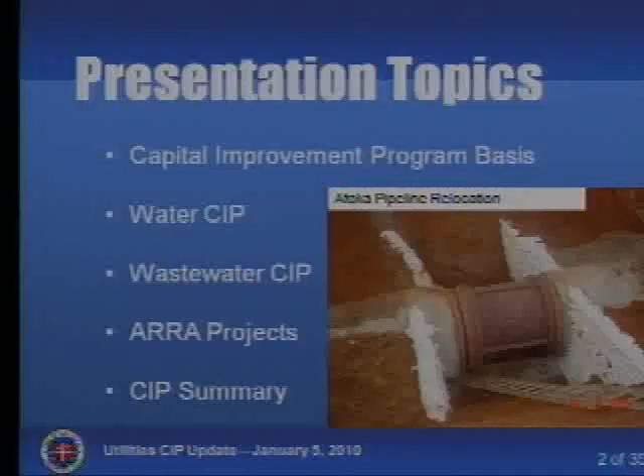Hello, my name is Sam Samandi, engineering manager for the utility. I'm here today to give a brief presentation on what we're doing with the CIP program. I'm going to cover a little bit about the basis of the program, then delve into the water portion of the CIP and the wastewater, and summarize what we did with the ARRA projects.

The basis of the program, the driving force behind all of our CIP projects, is on the water side the water master plan conducted in 2003, and the wastewater master plan conducted in 2009. In addition, we do an annual system review and evaluate projects, and if we need to modify the CIP, we'll update that. Another big issue for us is making sure we are in regulatory compliance with our system.

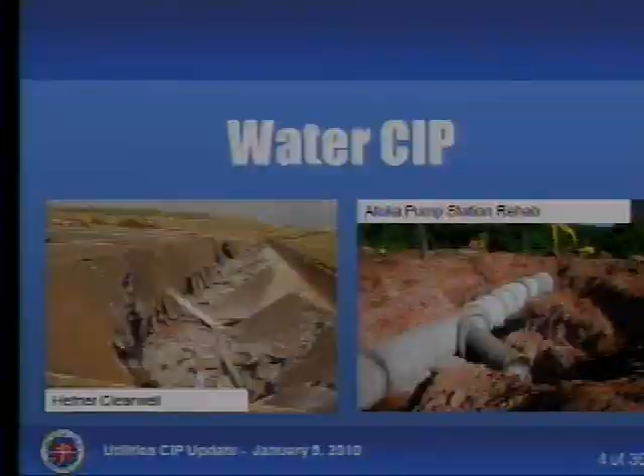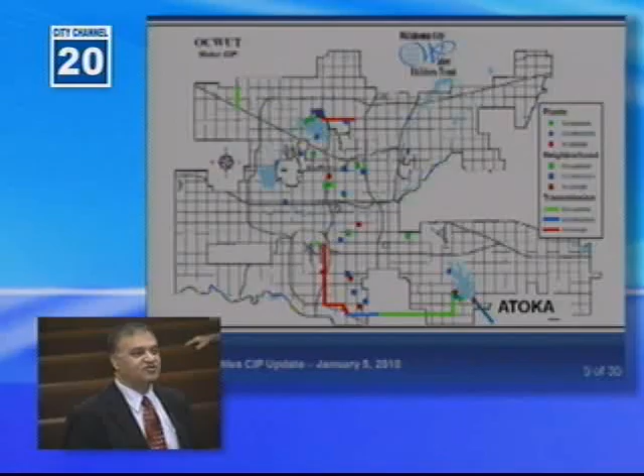We start with the water CIP. This particular chart shows the city of Oklahoma City and essentially shows the projects we've been completing for the past 6 to 9 months, the projects in construction, and what we're thinking about doing in the design side in the near future. A lot of those blue dots are right in the center of Oklahoma City, where most of the projects within residential areas and rehab work are happening. Another major aspect is the big water line, which we call the westward extension, from Draper to west of Oklahoma City.

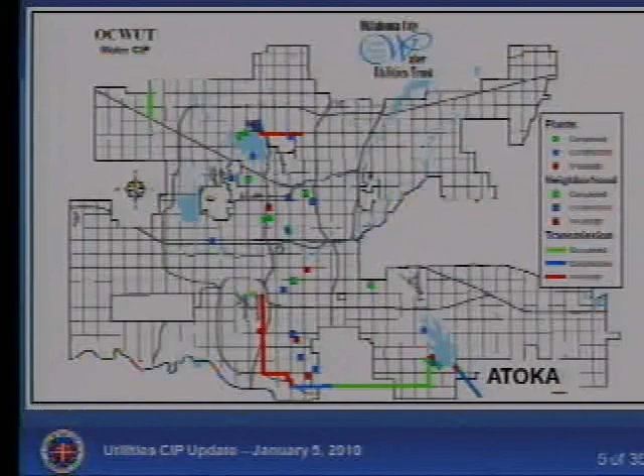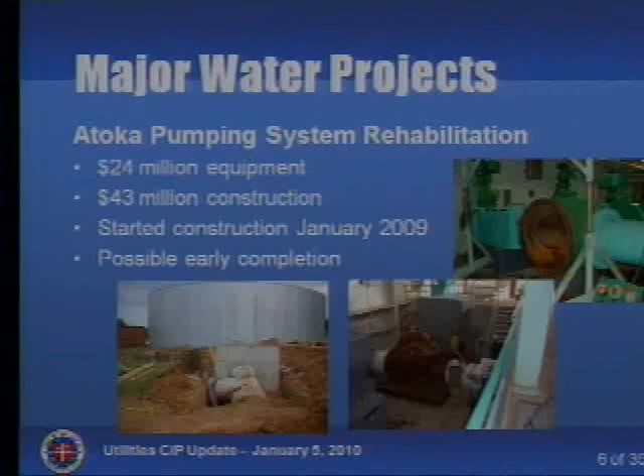Some of the major projects in construction include the Atoka Pumping Station Rehab Project, so far about $67 million worth of equipment and construction. The project started in 2009, last year about this time, and we're hoping for an early completion by the end of this year. It was scheduled to be completed in August 2011, but we're hoping to beat that by about 8 to 9 months.

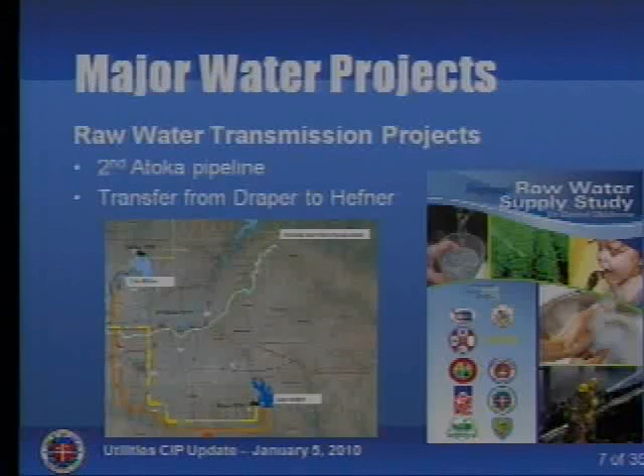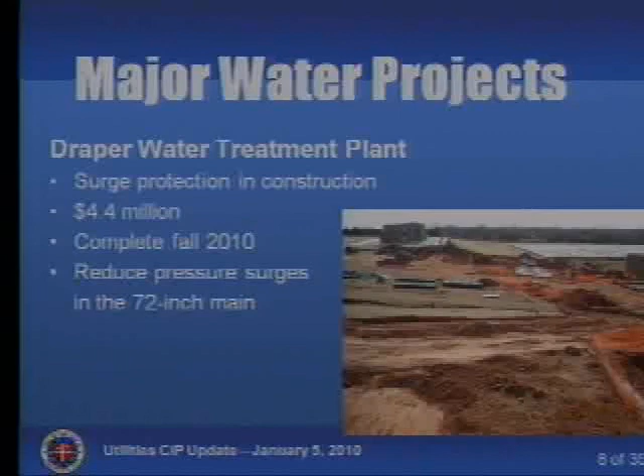Other projects we're considering include a second Atoka pipeline, and we've started some work on that. Also under consideration is the transfer of water from Draper to Hefner. Another major ongoing project is providing surge protection for the Draper water treatment plant. Hopefully this will help minimize breaks on the 72-inch pipeline, which has given us trouble in the past, and we hope it will be completed this year in the fall.

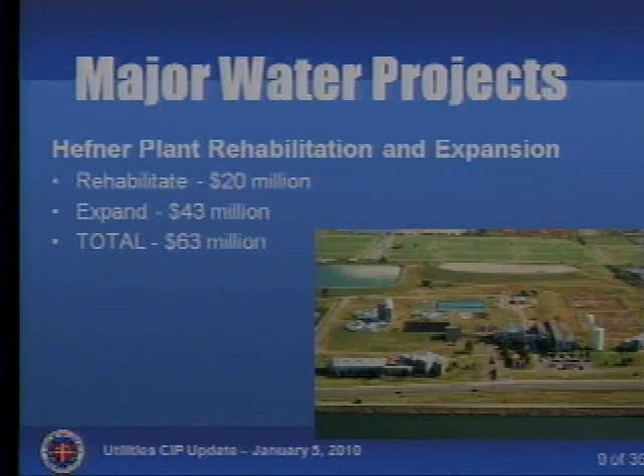Another major project is the work we're doing at the Hefner Water Treatment Plant, which we've heard about in a previous presentation. We've done about $20 million worth of rehab work, currently in construction, and the expansion will hopefully come in the next 6 months, estimated around $43 million, totaling around $63 million.

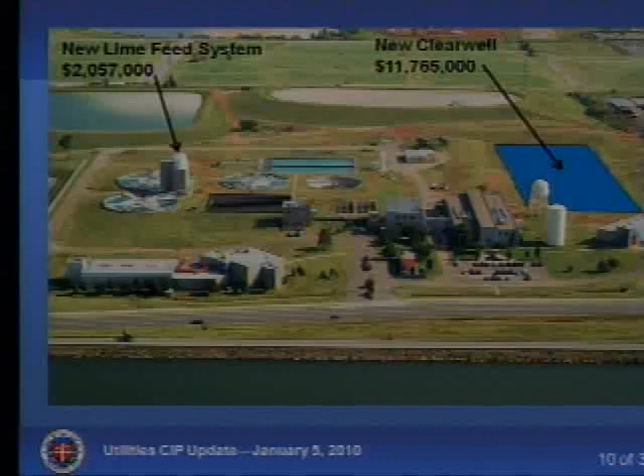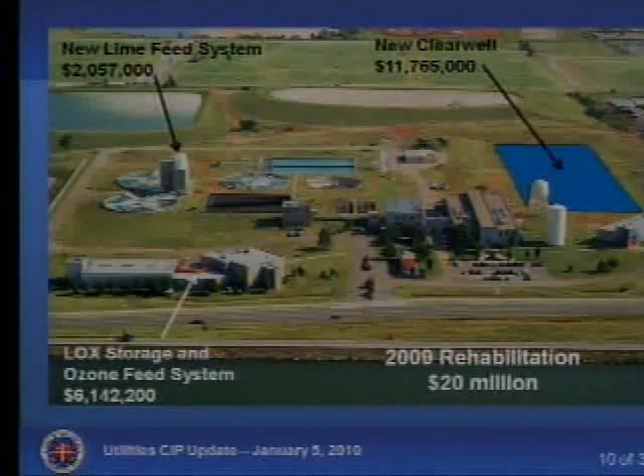This picture shows the rehab project that's ongoing. We're putting a new lime feed system at the plant, replacing existing clear wells that were dilapidated with structural problems, and replacing the air system for the ozone feed system at the Hefner plant. Somewhere around $20 million worth of work.

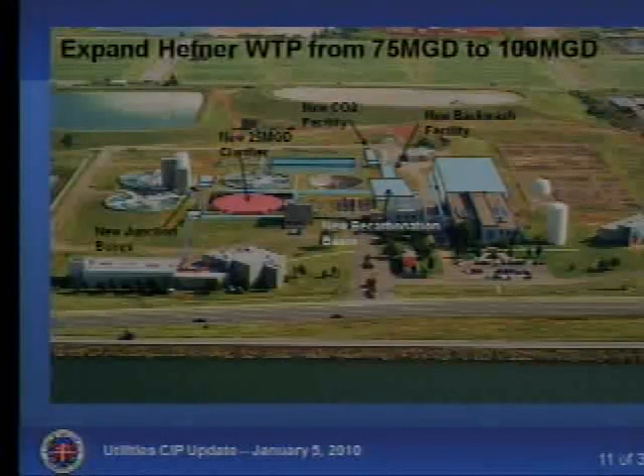The expansion project itself involves adding another clarifier to go from 75 MGD to about 100 MGD, adding a new carbonation system and more filtration to the plant. Around $43 million, we hope.

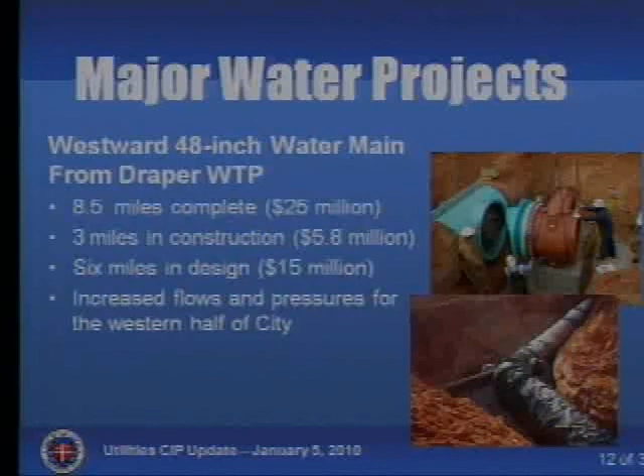This is a major system project we're doing, the westward extension, providing a 48-inch line parallel to the existing 72-inch line from Draper plant toward west of town. We've done about 8.5 miles already, 3 more miles in construction, and 6 miles in design that we hope to get out this year. This provides added flows and pressures to the system to the west of town.

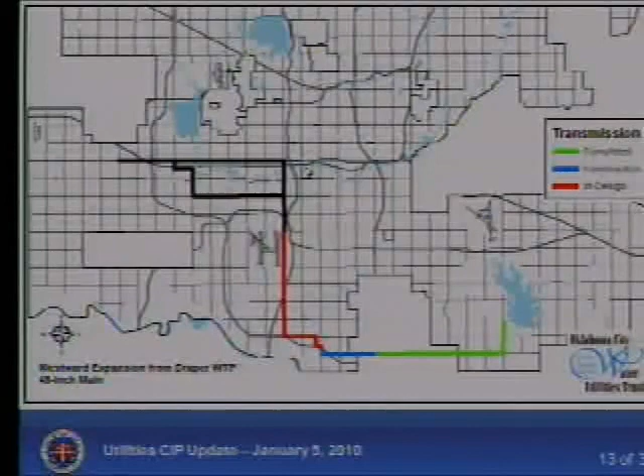This particular graph shows graphically where we've been. The green line shows what we've completed, 8.5 miles. The blue line is the portion in construction now, and the red line is the portion in design. The idea is to get that line extended all the way to the west of town.

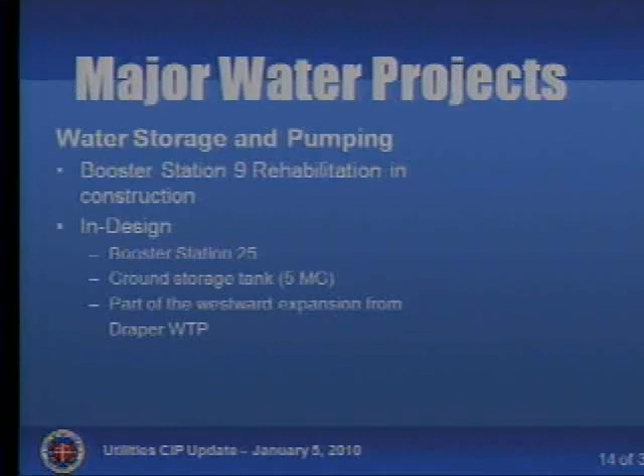Another part of this project is building another booster station on this line. We're also in the process of rehabbing booster station 9, which feeds the western side of town. It's a critical booster station for us.

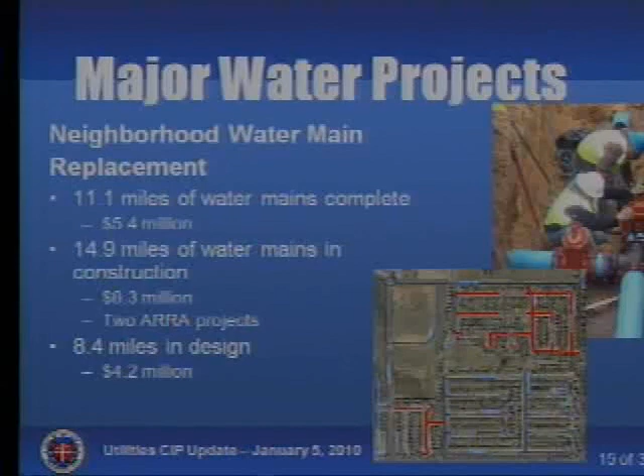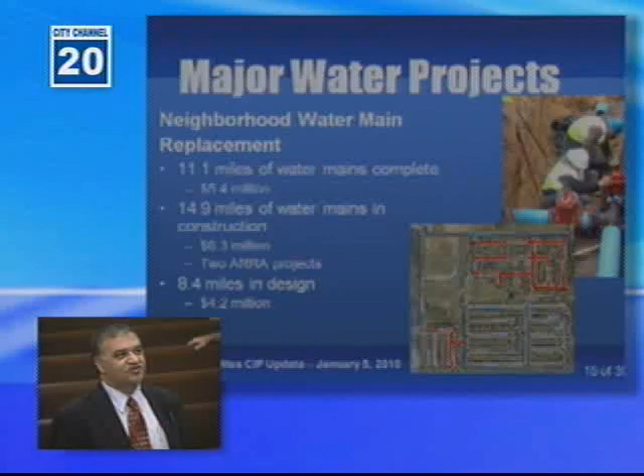We've also not neglected doing work around the neighborhoods, because that's an important part of our work. We've done about 11 miles worth of water line replacement, and we have close to 15 miles in construction. Out of that, $6.3 million came in relation to ARRA projects. We have about another 8.4 miles in design that hopefully will get out the rest of this year.

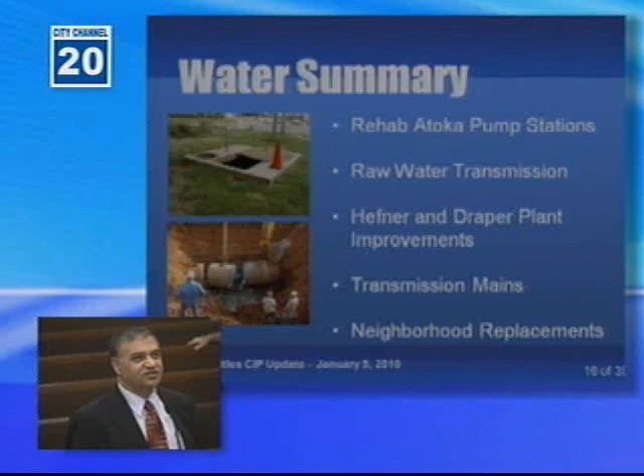In summary, the major aspects of our jobs are making sure the Atoka pipeline is rehabbed on time and gets into service quickly, attending to our raw water transmission issues, completing the improvements at Hefner and Draper, and continuing with the transmission mains and replacing all the neighborhood projects we have to do.

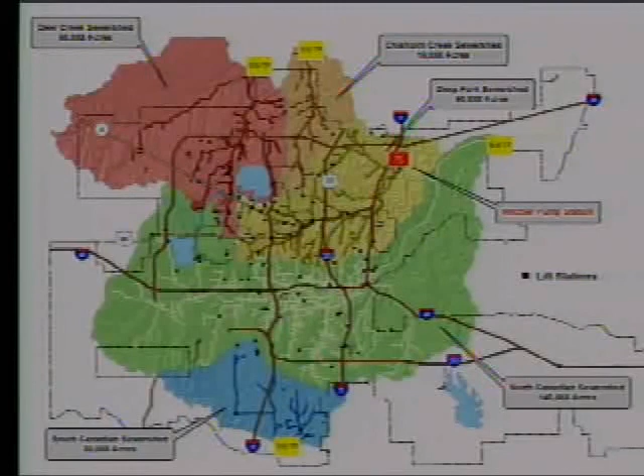On the wastewater side, as you can see on this map, it shows generally the sewer sheds within Oklahoma City. We have 4 major sewer sheds corresponding to 4 major wastewater treatment plants, 3 up on the north side of town and 1 down south.

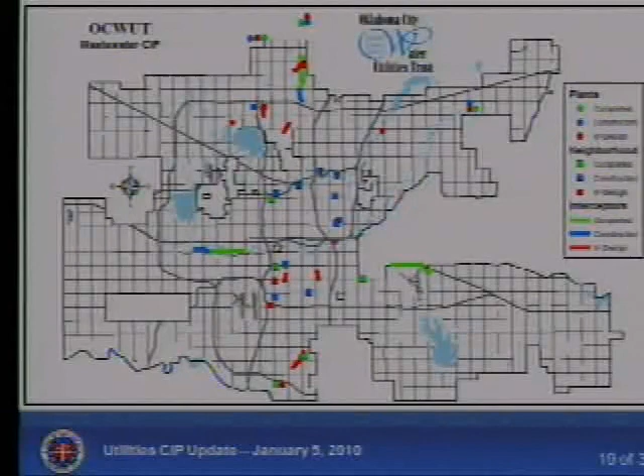We have already started the expansion project at the Chisholm plant. It's going from 5 to 10 MGD. It started last year, and we hope to have it completed by the end of this year. It costs about $16 million, and there's a possible expansion as we get closer to an agreement with the city of Edmond in the future.

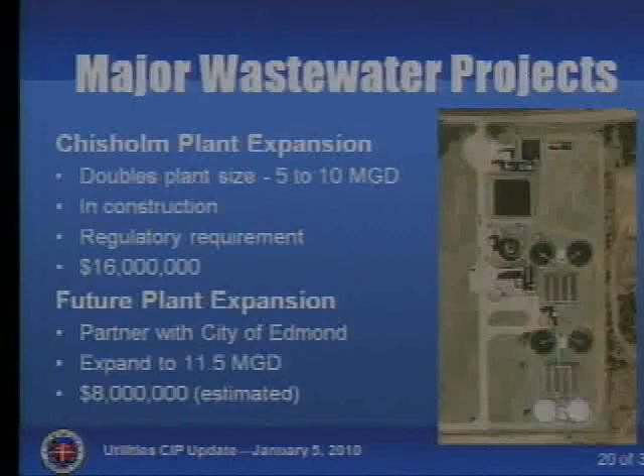This shows generally the map of the plant and some of the construction pictures associated with the expansion.

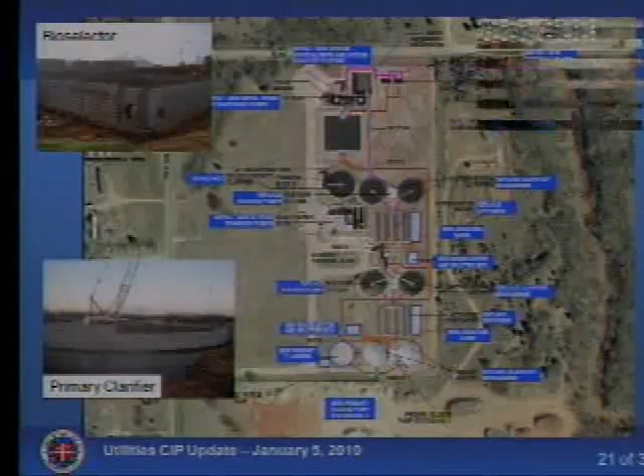Another major important project is providing wet weather protection for the South Canadian wastewater system. That project is in design and hopefully will be beginning construction sometime this year, in 2010. It's estimated to be around $14 million.

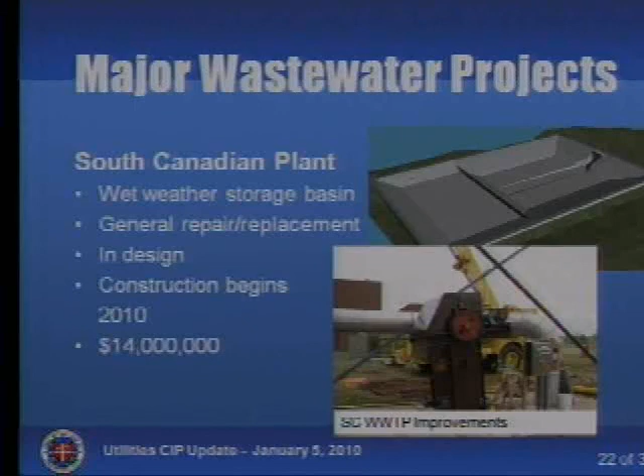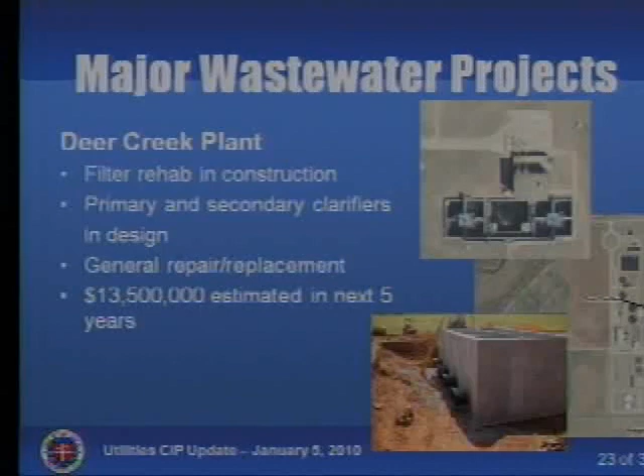There are other improvements we're doing at the plants, like replacing valves and air lines. At Deer Creek, we're also doing some filter rehab work currently in construction, and we have future designs for adding clarifiers to the plant. We plan to do about $13 million in the next few years, worth of improvements there.

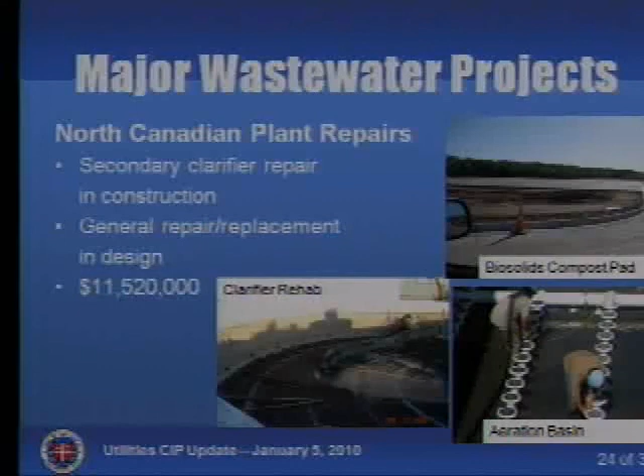The same kind of scenario at the North Canadian plant. We currently have a clarifier that needs repair, which is being done right now in construction, along with additional improvements at the plant, totaling somewhere around $11.5 million.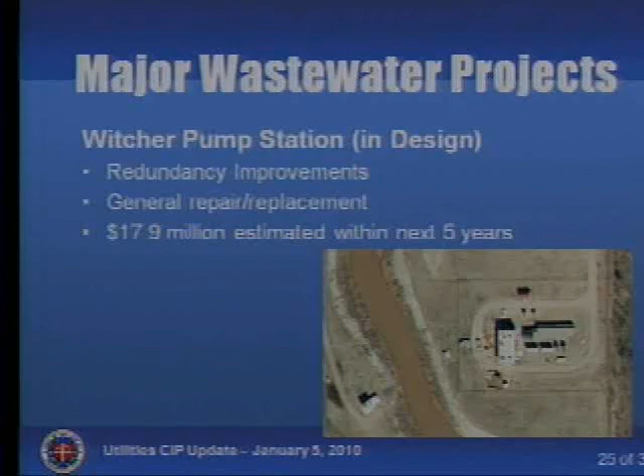We're also attending to one of our biggest pump stations, Witcher Pump Station, replacing pumps, valves, and those kinds of things. The pump station is getting a little older now, so it needs to be attended to. A good substantial amount of money has been allocated to take care of those issues.

In addition to the plant work, we're doing a lot of interceptor work, relief lines that need to be done. Notably, the Chisholm Creek Basin needed a lot of relief line, and a lot of that has been done. In the past 6 months, we've completed about 3.1 miles of it, and we've also done 2 more miles of relief line around the mid-urban part of the city, around Southwest 15 and Rockwell area.

What we have in progress right now is another 1.5 miles of the Chisholm Creek relief line from Northwest 150th to about Memorial Road, and about 3.5 or 3.7 miles of additional relief line all the way to County Line Road.

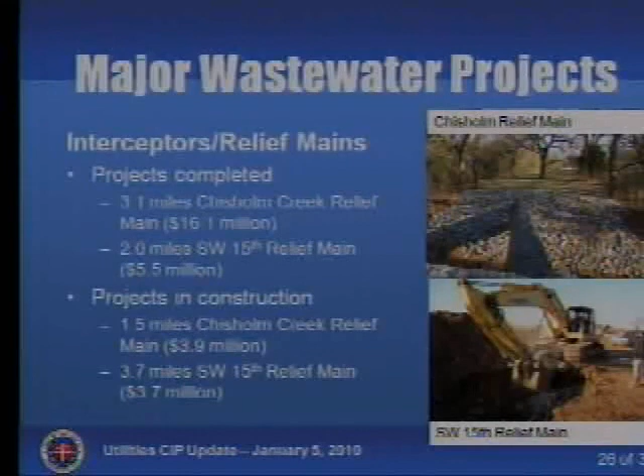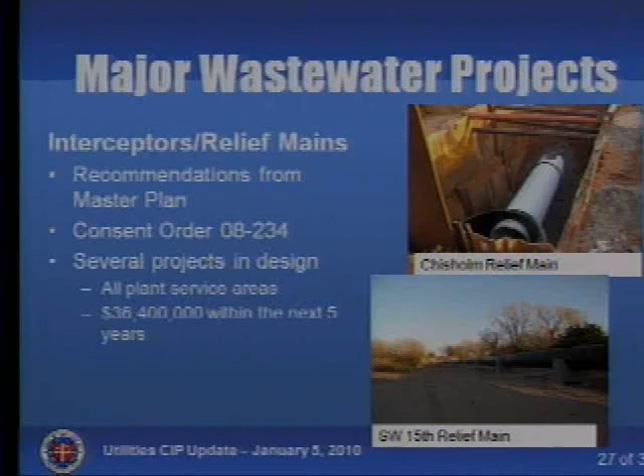The driving force behind running the relief lines and interceptors is rigidly dictated from the wastewater master plan, and our response to the consent order that we're under, which we have to comply with. All in all, we think we're going to spend somewhere around $36 million in the next 5 years building a lot of those improvements.

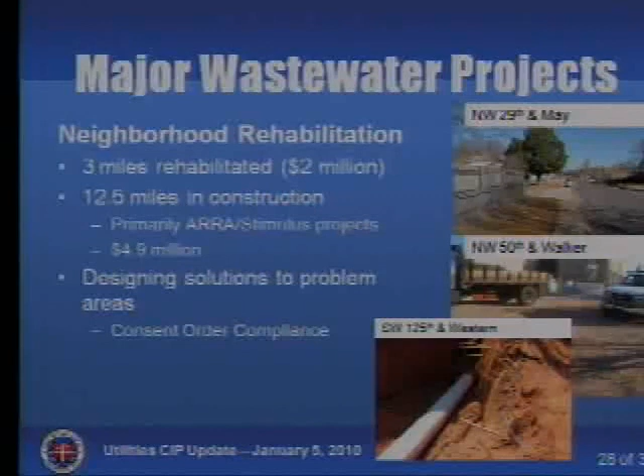In addition, we've done a lot of neighborhood work. We've completed in the past 6 months about 3 miles of residential area replacement. We have somewhere around a little over 12 miles of replacement in construction, and most of that was really driven by our ability to get the ARRA project underway, about $5 million worth of that. We have a lot more projects in design that we could take advantage of if other avenues show up later on.

In summary, we're doing major work at Chisholm and South Canadian, improvements at the other plants, building relief lines, and replacing sewer lines in the residential areas and neighborhoods.

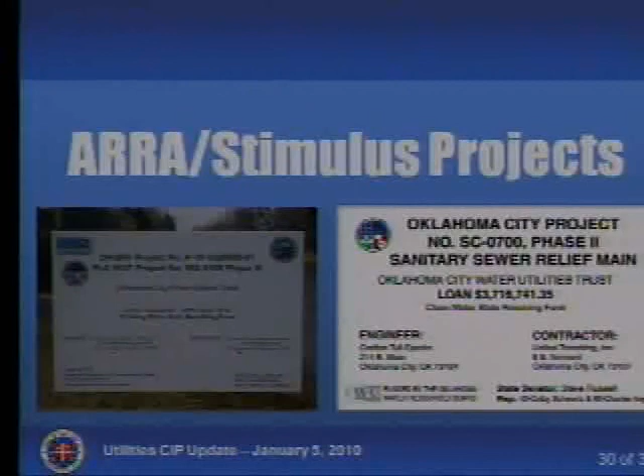The next couple of slides bring a little summary over the ARRA project, stimulus related. By requirements of the fund, we're supposed to put up signs around every one of these neighborhood projects. You'll see a couple of those on this slide. We did 3 major projects on the water side of the ARRA.

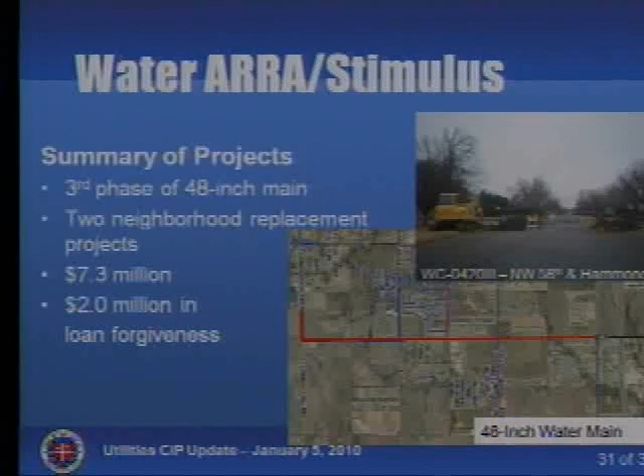One of those projects was this last phase of the 48-inch Westwood extension, which is in progress now. We awarded about $7.3 million worth of projects related to ARRA. $2 million of that is loan forgiveness for Oklahoma City.

On the wastewater side, we completed 12.5 miles of sewer line in residential areas, totaling somewhere around $8.6 million.

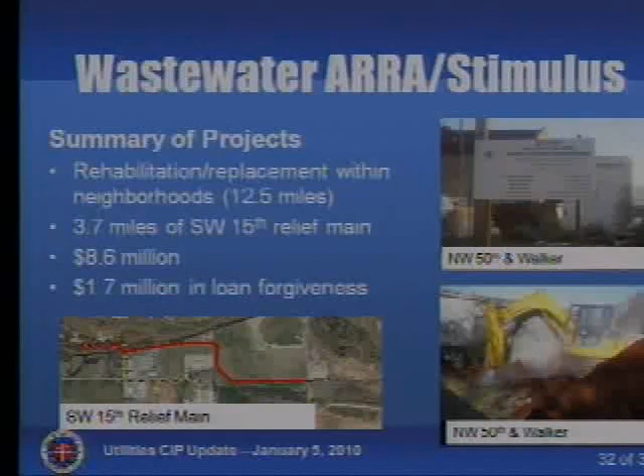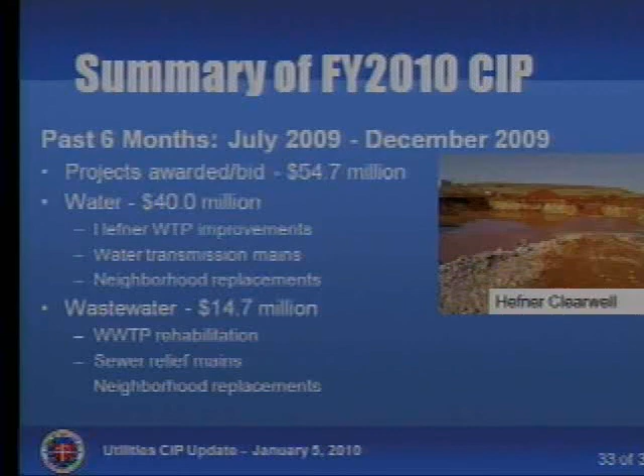We're hoping for a bit more than 1.7 in loan forgiveness. In summary, between July and December of 2009, we've awarded or bid around $55 million - $40 million related to the water side and $14.7 million to wastewater, not including the $16 million for the Chisholm plant expansion.

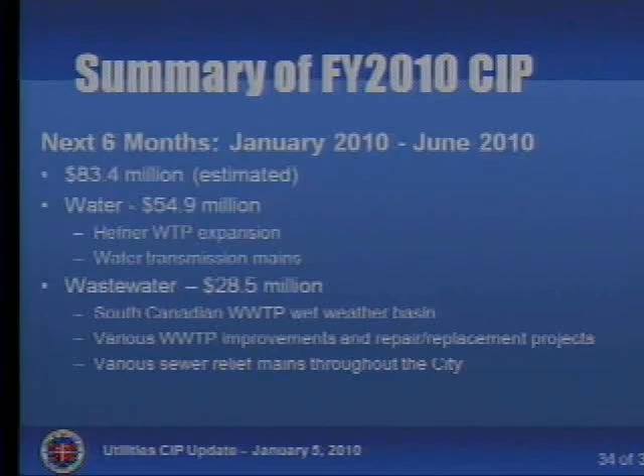Hopefully in the next six months we'll put out more projects, somewhere around $83 million, most of which relates to the expansion at Hefner Water Treatment Plant and work on the wastewater side for the South Canadian wet weather flow basin. That brings me to the end of this presentation. I'll be happy to answer any questions.

Thank you, Sam, great report. A couple quick questions - did I understand that work at the Hefner Water Treatment Plant will start in the first half of this year? Yes, our plan is to bid the project around April or May, with construction beginning in July. Will construction be completed in calendar year 2010? Our hope is that it will be completed within 18 months after the beginning of construction.

I noticed there was no specific project in your plans for the line from Draper to Hefner. Yeah, it's being evaluated for feasibility, which depends on demands in the north part of town. We're evaluating when is the best time to do that, and whether it's better to have a raw water transmission line or a treated water transmission line. All of those questions are being evaluated at this time.

Thank you. Any more questions? Any further questions? Thanks. Thank you.

Next item on the agenda is item 6A, acceptance of a renewal of easements along the Atoka water line.